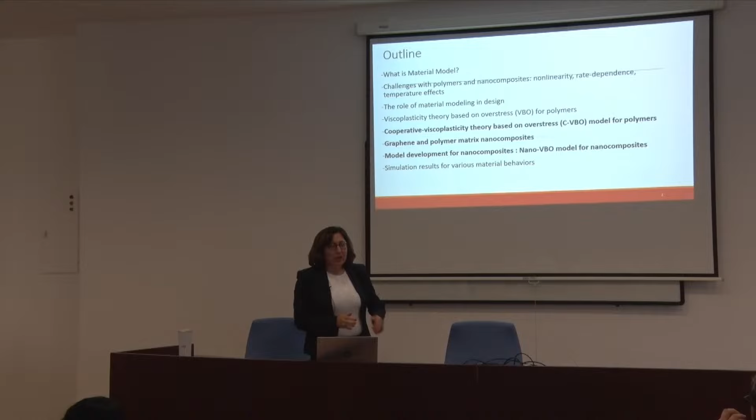The outline of my presentation will be as follows. I will first start with the definition of material models - what is a material model, and what are the challenges with polymers and nanocomposites. Then I will talk about the role of material modeling in design, and specifically the viscoplasticity theory based on overstress. Then I will mention graphene and graphene epoxy nanocomposites, and the last section will be model development for nanocomposites, with some simulation results at the end.

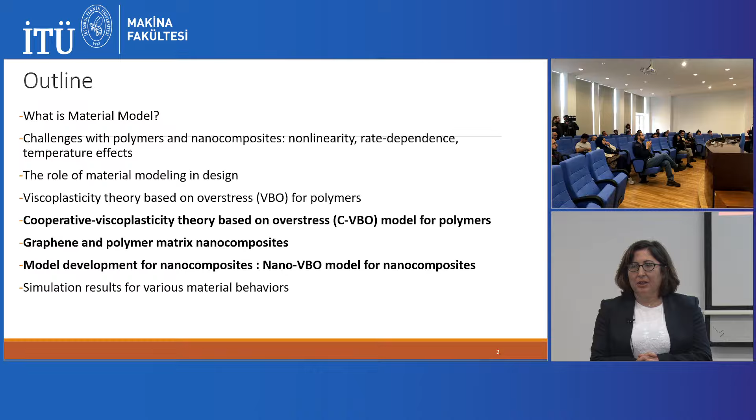So what is a material model? Why do we need a material model? Basically, a material model mathematically represents the relation between stress and strain. We know that all components, all machine elements or parts, are under the effect of different loads. As a result of these loads, we observe stresses and deformation, and we would like to find out the relation between them.

So when we say material model, or constitutive law, what is the well-known material model for metals? Everybody knows, I am sure - Hooke's law. Hooke's law is the material model which works well for metals, for elastic behavior. But when we come to polymers or nanocomposites, the situation gets complicated - it is much more complex and quite challenging. That's why today I will talk about these material models.

If you are going to use polymers in a structure, how are you going to design it, how are you going to use the material models, which material models should be used, and what is the process of developing these models.

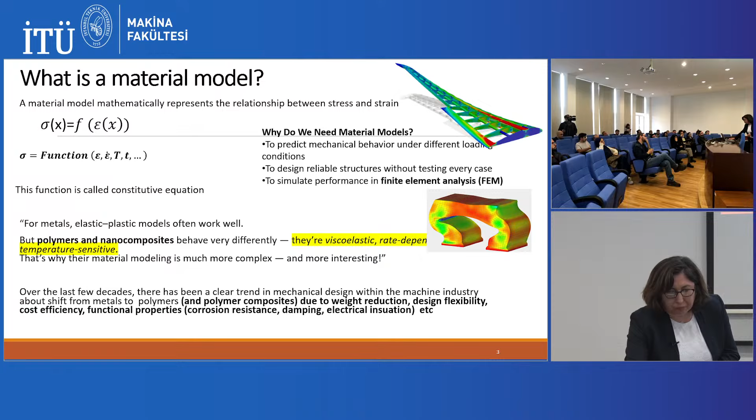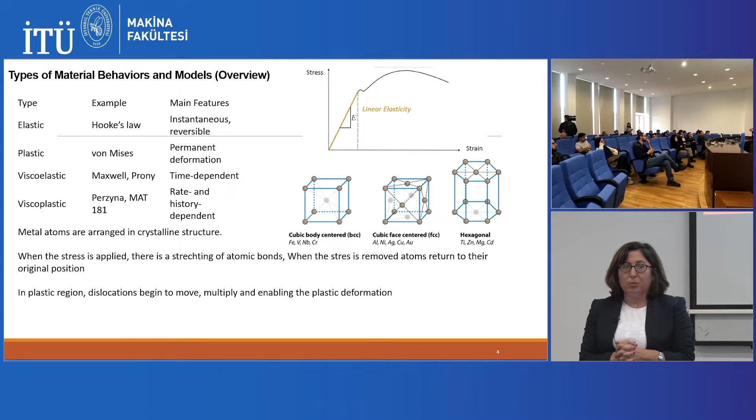So what is different from metals? We know that metallic materials behave elastically, and elastic and plastic behavior is observed. But when we come to polymeric materials, the behavior is viscoelastic. You can understand from the name that it is a little bit like solid and a little bit like viscous - a combination of elastic and viscous behavior, basically called viscoelastic.

So when the behavior is viscoelastic, what we observe is that material behavior is rate dependent. On the left side you see a stress-strain curve at two different strain rates - strain rate means how fast you are loading or unloading the structure. If the material is elastic, we get only one curve. However, if it is viscoelastic behavior, you observe two different stress-strain behaviors, because loading rate affects the material behavior. This is one of the main differences from metals.

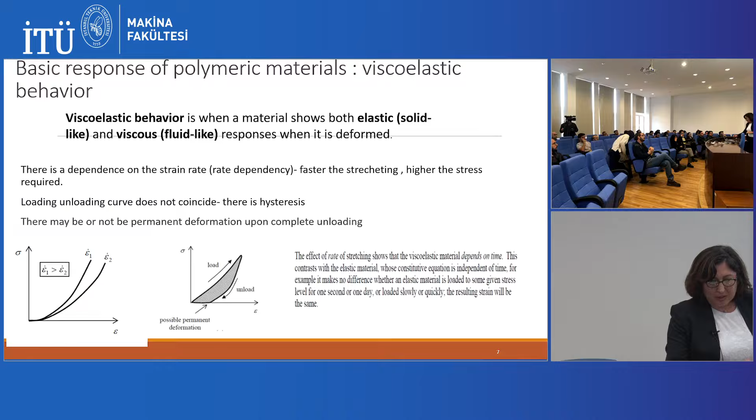So time dependent, the other name is rate dependent behavior. There are, of course, a couple of other observations about polymers, about this behavior. One of the behaviors is creep, and the other one is relaxation. These are the common behaviors that we observe in polymeric materials.

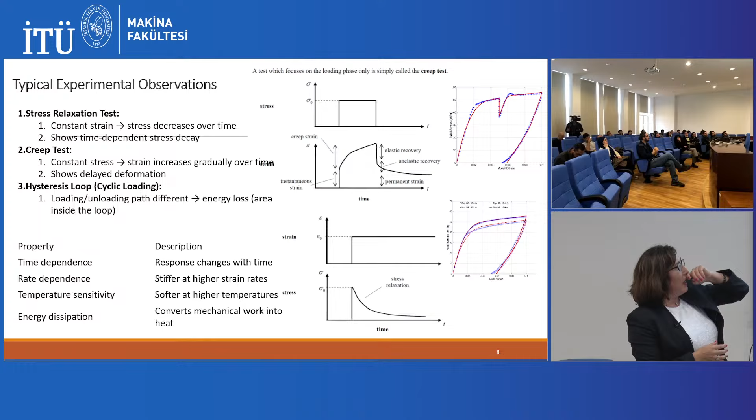On the right side, you can see some stress drop in the stress strain curve. This is basically the relaxation that we observe, or some creep behavior. In Turkish we call creep sürünme. At constant load, we observe deformation on the material, so the deformation is not constant, with time it changes. These two behaviors, in addition to rate dependency, give us the idea about viscoelastic behavior, and we need to define these viscoelastic behaviors.

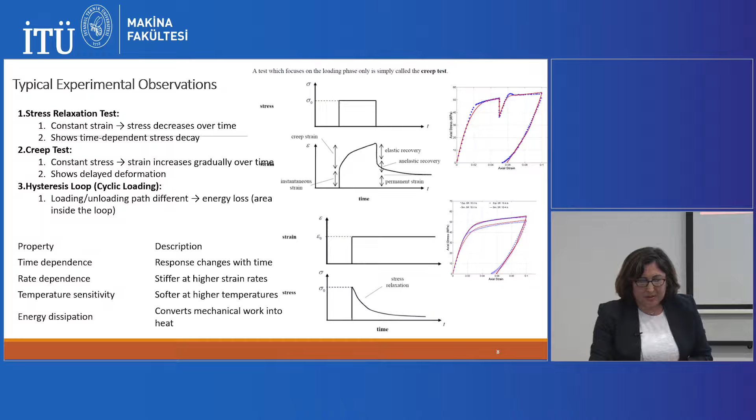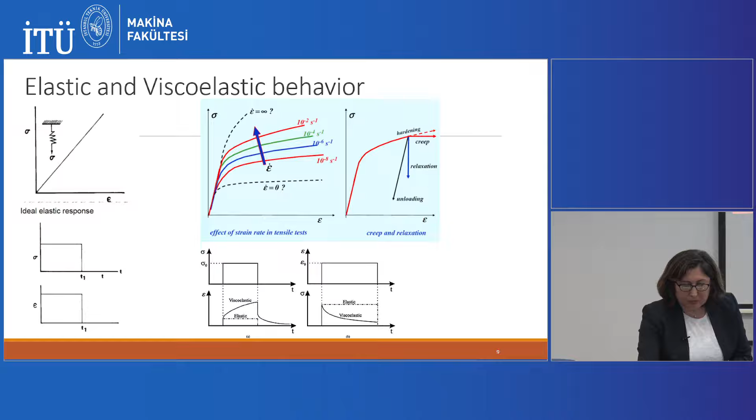So we need to define such a behavior. Such rate dependency needs to be defined. For that purpose, different material models are used. The well-known ones are the Maxwell and Kelvin models. Viscoelasticity basically starts with the introduction of these Maxwell and Kelvin models, and combinations of them have been used quite extensively.

Today I would like to talk a little bit about what a model should consist of in the case of viscoelastic or viscoplastic behavior. Especially during the design process, if you are using a new material and you do not know how it behaves or which material model you will select in the design, you have to know exactly what's going on, or how we can define this behavior.

So what should be the essential components of the viscoelastic model? When we consider the elastic behavior, we just use the spring. Spring behavior tells us the elastic behavior, there is nothing else. But in the viscoelastic case, we include the dashpot element as well, because it gives us the information about this viscous behavior.

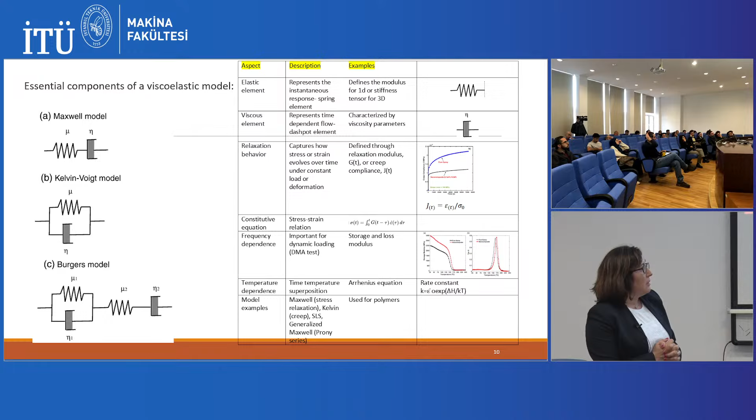Considering these spring and dashpot elements, it can be just one, or a couple of them can be together, like in this case. And there are some other properties as well. If you are interested in temperature dependency, you need to include the temperature effects, or for some frequency dependency, you have to include other effects. But as an example, Maxwell, Kelvin, generalized Maxwell, standard linear solids - these are the material models for viscoelastic behavior.

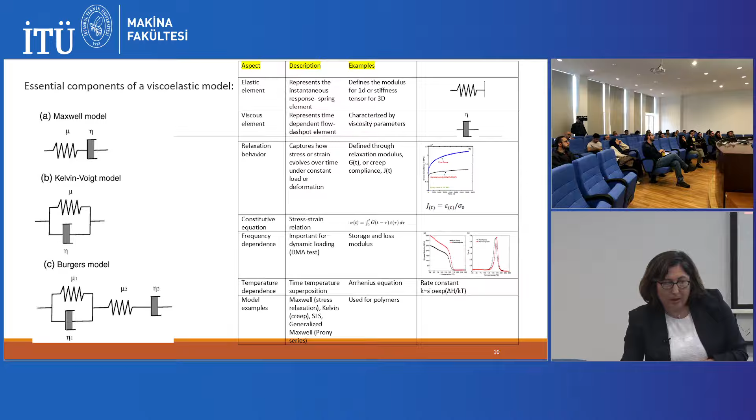When we come to the viscoplastic behavior, in fact metals behave viscoplastically, some of them, not all. So for metallic materials, you can also use viscoplastic materials, because some materials like stainless steel behave elastic and viscoplastic.

So in the case of viscoplastic, again you need similar things. Apart from what I mentioned about viscoelasticity, you need a yield surface. So what is yield surface? In the elastic, if you are dealing with elastic and plastic behavior, or viscoelastic, viscoplastic behavior, you have to figure out at which point the yielding occurs. Everybody knows, I guess, what is yielding - akma in Turkish we call it.

So you have to specify at which point it is going to yield, and for that purpose we need a yield function. Von Mises, I'm sure you guys heard of it. So von Mises yield criterion has been used extensively, and these plasticity models are present as well.

Hardening laws, because material hardens. You remember the material classes - after yielding, you observe some hardening, and you have to specify this hardening as well. And materials are under the effect of cyclic load, not just loading. So in this case you need to define this kinematic hardening as well. These are basically what should be in a viscoplastic model. Of course, constitutive law or strain rate formulation is also an important phenomenon in these models.

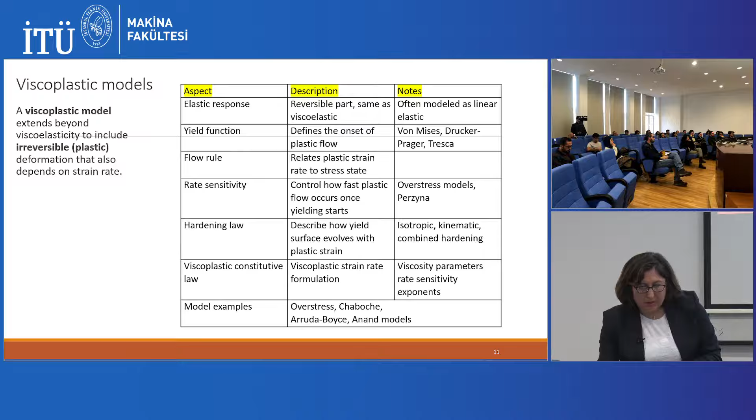I put some of the material models in ANSYS. I select some of the elastic, plastic, hyperelastic, and viscoelastic models. There are quite a bit of material models, so the process of selecting the proper one is important. As an engineer, your role should be deciding which model is proper for your application. Otherwise, the FEM results don't have any meaning. If you didn't select the proper material model, the rest is just garbage.

But I see generally people who deal with finite element analysis, if you are especially working on metals, elasticity modulus and Poisson's ratio solve the problem. But for different materials, for polymers, for elastomers, etc., deciding which one is better or which one is proper is quite important.

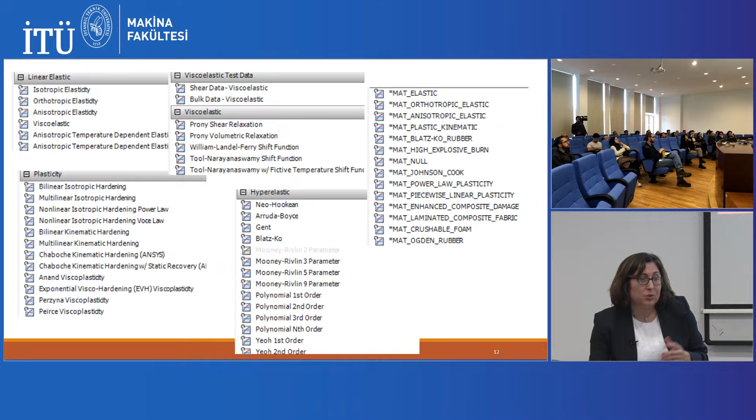I'm going to talk a little bit about what should be in each model. Each viscoelastic and viscoplastic model should contain these components. I don't know if there are some PhD students in the audience, but if you are going to deal with this material development process, in a couple of minutes I'd like to talk about what these steps should be and how you can develop the material model.

The role of the material models I already mentioned a little bit, but again, in structural analysis this is the most important component because it gives us the relation between stress and strain. So how we are going to develop the material model.

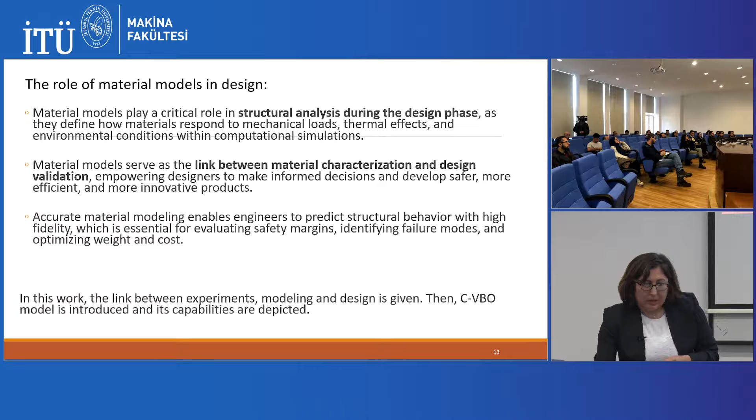Today especially I'd like to focus on this: what are the main steps, from where we have to start? Starting point is always experimental work. You have to perform experiments at different loading conditions. On the left side, you see some of the results of the experiments. Considering this experimental work, we develop the material models, because macroscopically whatever we observe — I'm talking about the macro model, or phenomenological model, or continuum theories as we call it.

There are different scales, and there are so many different material models. In the second part, you can see the different scales. It goes from continuum to micro, meso, nano — so many scales.

But as engineers, we are interested in the macroscopic level models. Of course, the other material models are quite important because whatever we observe macroscopically depends on what's going on at the micro level. That's why we have to know what is going on at the micro level and the connection between them. There is so much work going on in this area — how we can link these models is another issue we are dealing with.

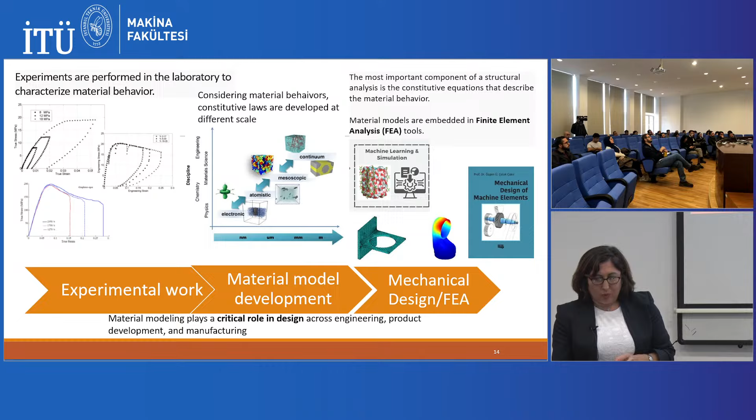Specifically, after mentioning these issues, I'd like to talk about the VBO model that I've been developing over the years. This is the viscoplasticity theory, developed by Erhard Krempl. He was such a nice guy — he was my PhD advisor while I was at RPI.

Overstress is — I don't know if anyone here deals with plasticity rules — generally we mention that you need a yield surface. In this theory, we do not have a yield surface; instead, we have the overstress concept, and there are some state variables as well.

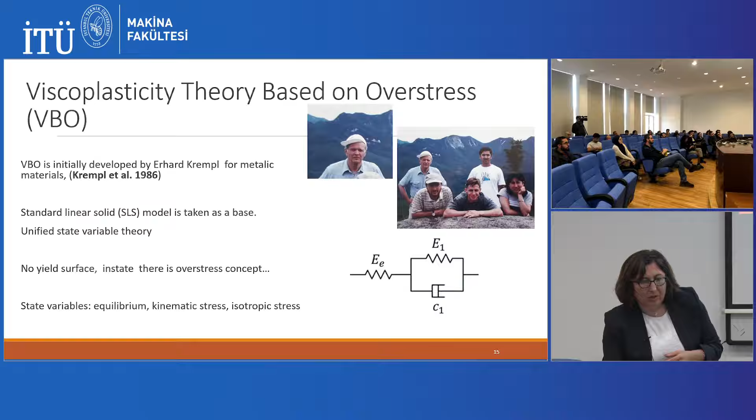These are the formulations — the flow rule for the VBO model. This D is similar to epsilon; epsilon strain is used in small deformation, but if you go to large deformation, it becomes the rate of deformation tensor. That's why the formulation is written as D elastic plus D viscoplastic — basically a sum of elastic and viscoplastic behavior, or viscoelastic-viscoplastic behavior. The first section is basically Hooke's law, but the second section tells us about the viscoplastic behavior.

On the right side, you can see this SLS model, but a modified version — the spring and dashpot become nonlinear.

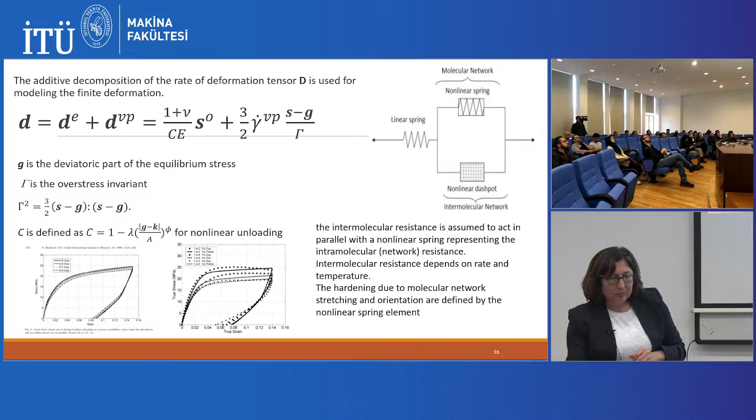We mentioned that for the viscoplastic region, kinematic hardening, isotropic hardening, or combinations are important. So that's why the model needs you to define these quantities into the theory as well.

So K here is kinematic stress. It is used to model the Bauschinger effect. Isotropic stress is for cyclic loading. I won't go into details of them, but basically in the theories we need them. We also have equilibrium stress, which is quite different from some plasticity theories in the literature.

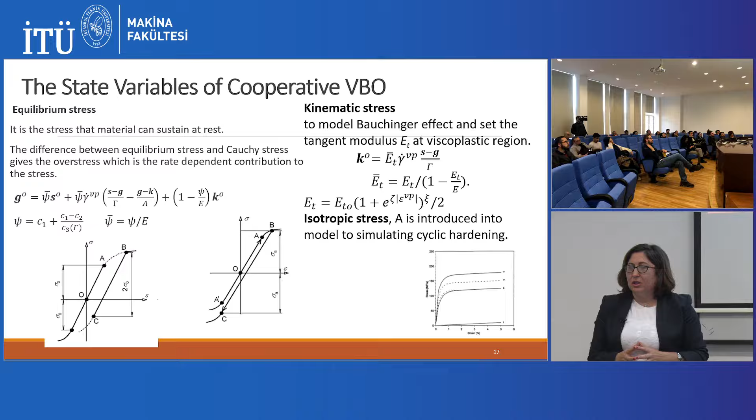The last important formulation is the viscoplastic strain rate. This viscoplastic strain rate, considering the Eyring equation, is this one.

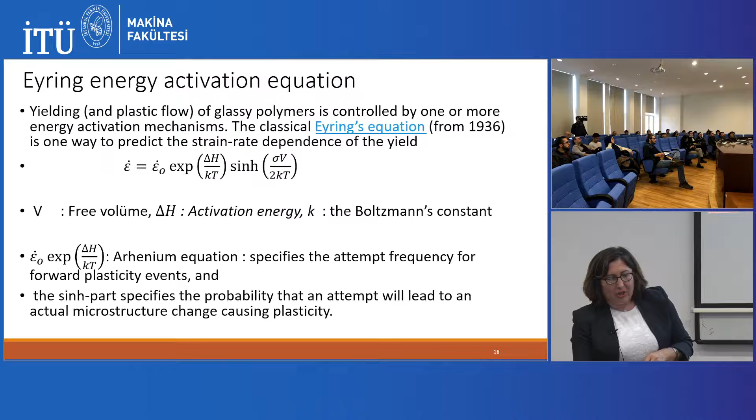In 1936, Eyring defined this formulation, and he considered that yielding is controlled by some energy activation mechanisms, and he defined this formulation considering the activation energy and free volume, etc. Considering this formulation, I implemented or modified it and used it in the VBO model, considering this Eyring formulation.

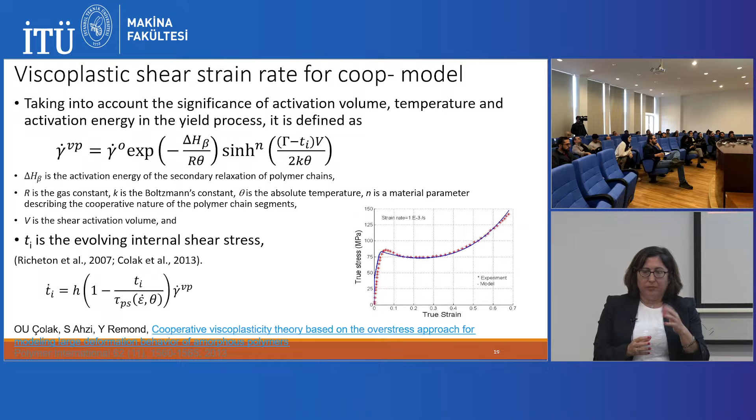So we mentioned that the material is rate dependent, also temperature dependent. So it means that you have to define the elasticity modulus as a function of the rate and the temperature.

So are you guys familiar with this graph on the right side? What can it be? I don't know whether you have seen it in material classes. This is a dynamic mechanical analysis result, DMA it is called. If you are dealing with polymers, you definitely have to run this test to find out the transition, to find out the glass transition temperature and how the properties are changing.

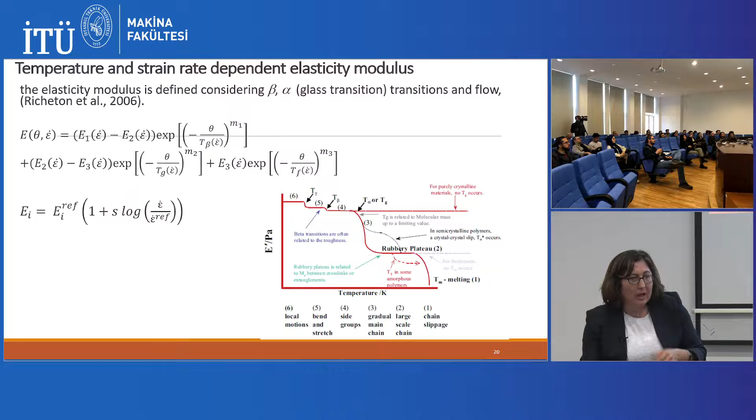This is important. Considering this DMA, we modify the elasticity modulus as a function of rate and temperature as well. But in an earlier version, for instance, we just used 1E. But this is the final form of the model. These are some simulation results.

This unloading behavior, on the left side you see loading and unloading. Nonlinear unloading behavior is not an easy behavior that can be captured. If you go to the literature, you will see that most people just deal with loading. But when we come to the unloading, if it is nonlinear, it is not easy to define. But with this modification, we are able to simulate this behavior.

On the right side bottom, this is multiple creep, which is also captured. Relaxation - these are important in the components. For instance, in a press fit application, relaxation is important.

In a preloaded screw connection, it is important because if you load a structure, you expect that load to stay constant. It shouldn't drop. Creep for structural stability is quite important. If the deformation is increasing with time, you lose structural stability, meaning you cannot use this machine element anymore. So that's why you have to know how the material behaves if you are dealing with polymers.

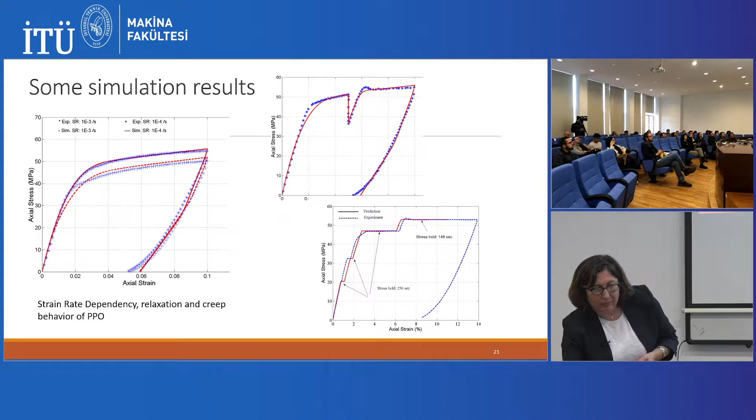What is also interesting in polymers is that behavior is not just one type. For instance, in metals it's linear elastic then hardening, that's it. But depending upon the material, polymers behave differently.

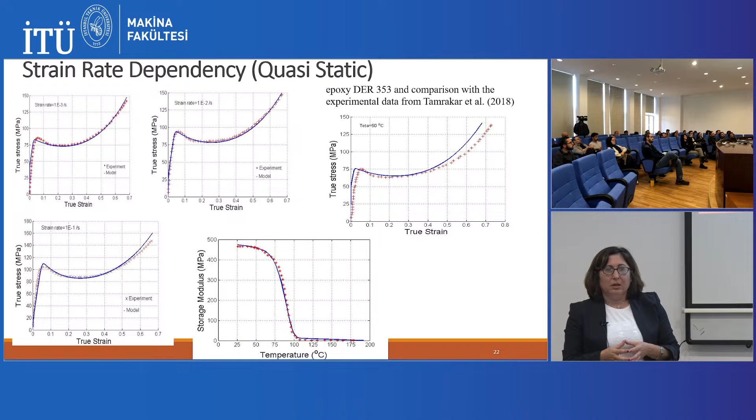For instance, here, what is this one? PPO. The behavior of PPO is something like this. Epoxy's behavior is something like this - some linear behavior, yielding, softening, and hardening. So these are different behaviors that we observe, and with this model we are able to capture all this rate dependency and temperature dependency as well.

This is for a hypothetical, made-up material. I showed some cyclic loading - we are able to capture it as well.

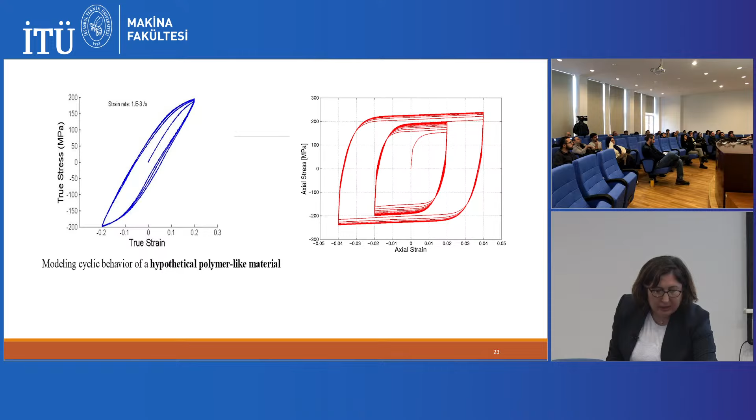So far I just discussed the material models, viscoelastic material models, and specifically the VBO model for polymers. Now I would like to talk about nanocomposites, because of what my PhD students and myself did. We are modifying the present models for polymers, and by modifying these models we are able to model nanocomposites as well. So the question is how we will go from the polymer model to nanocomposite modeling.

I will discuss this, but before that, I would like to mention a little bit what nanocomposite is. So could you just read a little bit while something is happening to my throat? I'm sure you guys know composite - what is composite?

Mixture of materials means there are at least two components. One component is called matrix, the second component is filler or reinforcement. Polymers, even with many good properties, don't have high strength, so we cannot use them for every application. What we need to do is make composites. A composite can be just a composite, or it can be a nanocomposite. In a composite, the filler is not in the nanoscale, it's at the macro level. But nanocomposites also consist of at least two components, matrix and reinforcement, except at least one component should be in the nanoscale.

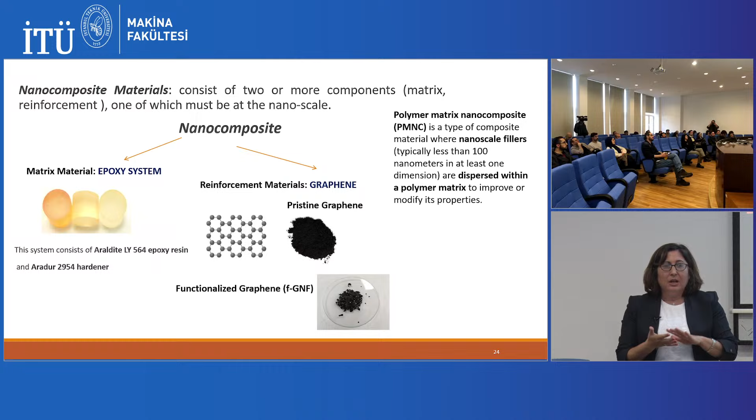What is the main material in graphene? Carbon, graphite. With different manufacturing techniques, these graphite layers are separated from each other, and you get one single layer - that's amazing. So who discovered this material? These guys, Andre Geim and Konstantin Novoselov, in 2010, and they got the Nobel Physics Prize.

Since then, for 15 years, there has been so much research going on in this area. As an academician, in academia or in industry, recently they also started to work on it, and it has been started to be used as a nanofiller.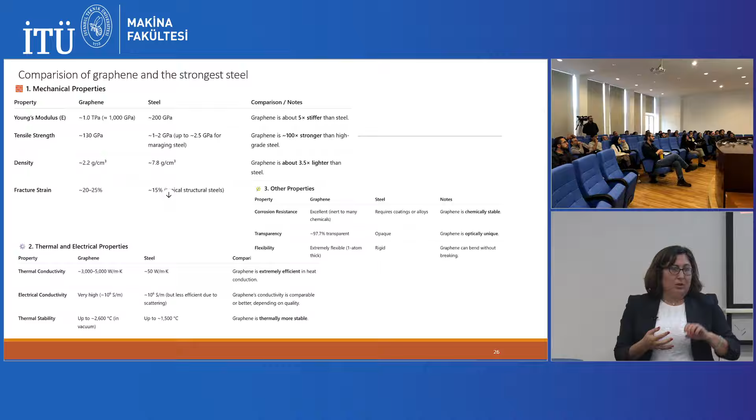But it's not only the mechanical properties - other properties, electrical and thermal properties, are amazing too. That's why it has been used for different applications. You can see some application areas: multifunctional graphene epoxy, insulating packaging, aerospace applications, sensor applications, automotive industry. Wherever you would like to decrease the weight and increase the strength, you can use these materials.

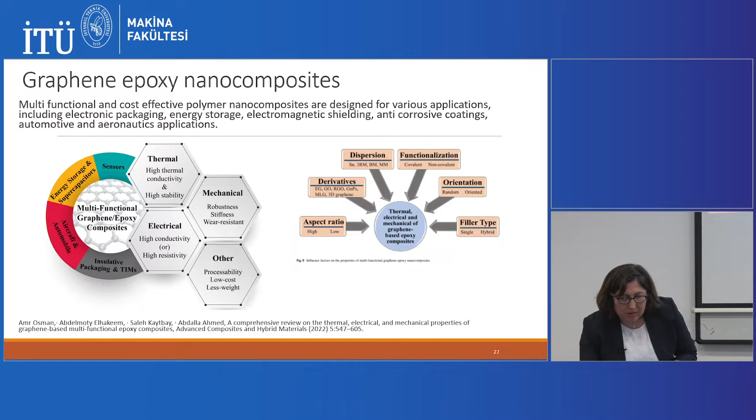Of course, even though this is a nanomaterial with such high strength at the nanoscale, you might consider how the stress strain behavior is captured. Can I use tensile testing equipment for this? What do you think - how do they get a single layer of carbon, graphene, and test it?

That is something the instruments in our labs cannot do. The method is nano-indentation, nano-indentation in an atomic force microscopy - that is also something recent in the world. People in the Makina groups are quite interested in this. We know atomic force microscopy or scanning electron microscopy - generally we use them for scanning the material, but they use it for testing as well, which is also important. It is called in situ SEM, in situ TEM. Because it is just one layer, the thickness is just one single layer, so how are we going to test it? This is the method - it's also something quite interesting. I will skip the details.

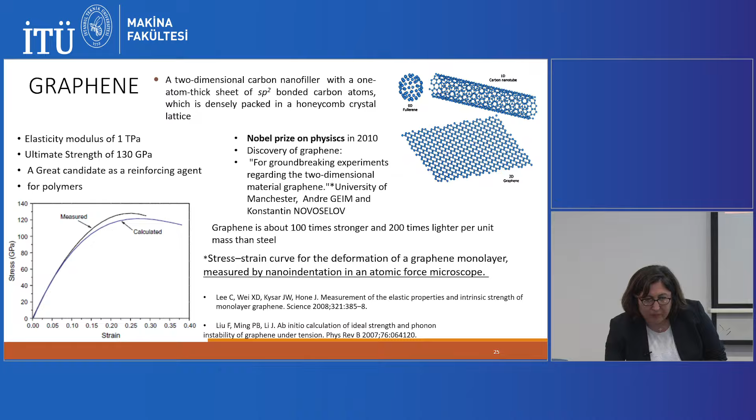So graphene is that strong, that powerful, has so many properties - let's use it and get the same result for the nanocomposites, we wish. But of course there are some issues. At the nanoscale, it's such a powerful material, but when we use it in nanocomposites, we do not get that powerful properties. The reason is two main issues. What are they? Let's look at it - there are two main issues in the manufacturing. Gökhan, how much time do I have?

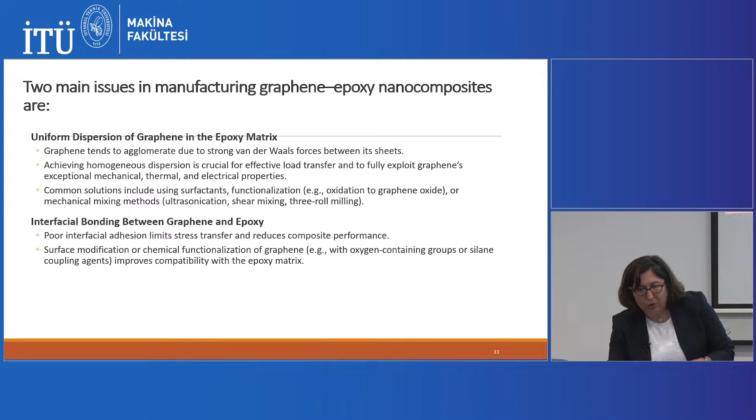For that purpose, what we have done is functionalization. Functionalization means you add some groups on the graphene so that it links the matrix better. Let's assume this is the matrix, this is the graphene. This connection is not good, but if I can make some wiring like that, it can connect. So functionalization is basically this.

This is the process that we are following in our lab. I will not go into details, but some mixing with a surfactant, sonication, filtering, etc., and at the end we get functionalized graphene.

If you guys are working on nanoparticles or nanomaterials, you definitely have to do a good characterization. So I have done this and gotten functionalization, but that's not enough, you have to prove it. You have to do FTIR, Raman, XRD, etc., so many characterizations, so that you can figure out that you really get the functional graphene.

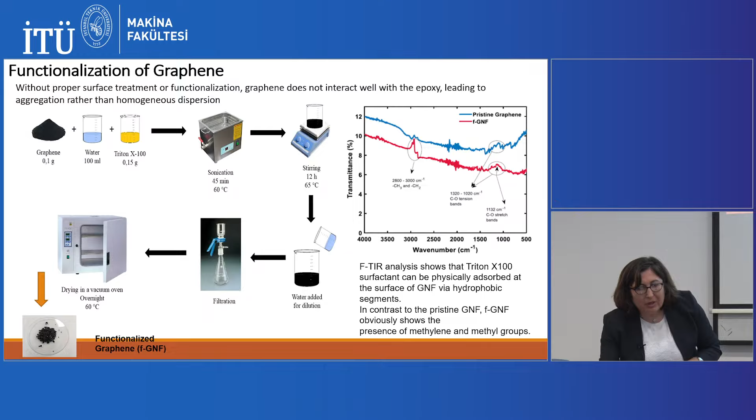Following this functionalization, we manufacture the nanocomposites. This is the method we are using: we basically mix the functional graphene with the epoxy, then use magnetic stirring, and use 3-roll milling. I think this is, at least for us, the last method we are using, because before we used different methods and didn't get good results.

This 3-roll milling work has been done as part of one of my TÜBİTAK 1001 projects, and we got this 3-roll milling machine. What does it do, what do you think? The machine has these 3 rolls, like a hole-punching thing. You just pour the material here, and then, as you see in the picture on the right, it just flows and you collect it.

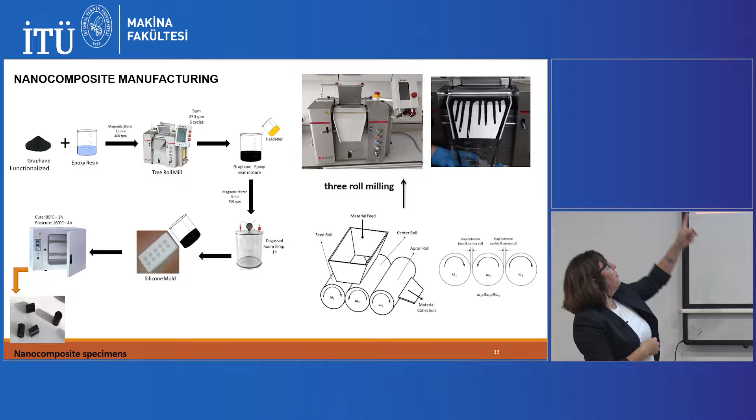So what is the advantage of 3-roll milling? The rolls rotate in different directions, and the distance between the rolls is 5 microns, so the space is just at the micron level. What kind of effect can this have? Shear—it applies shear to the material. Due to this shear, agglomeration (topaklanma) is eliminated.

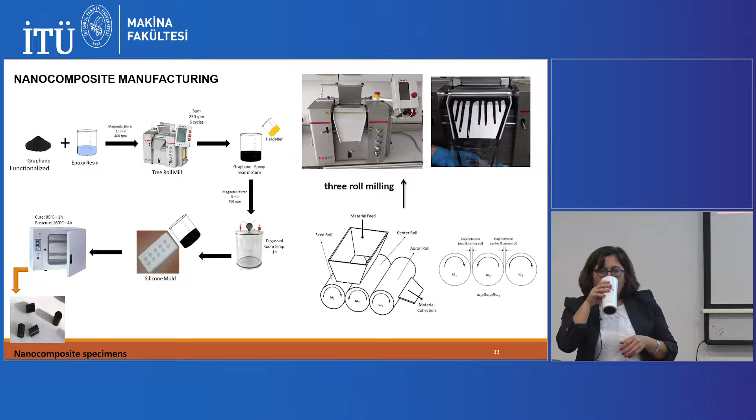We have seen this in our last couple of studies, and we've already published a couple of them. This gives a better result compared to sonication. There are some other steps that you have to follow, and some characterization.

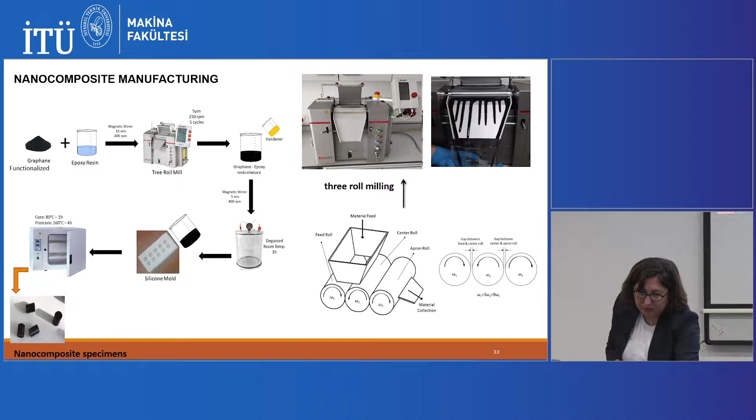Rate-dependent, temperature-dependent behaviors, and also creep and relaxation—these are a must, olmazsa. We have to perform these tests so that we can understand how the material behaves. For instance, the creep resistance is improved quite a bit.

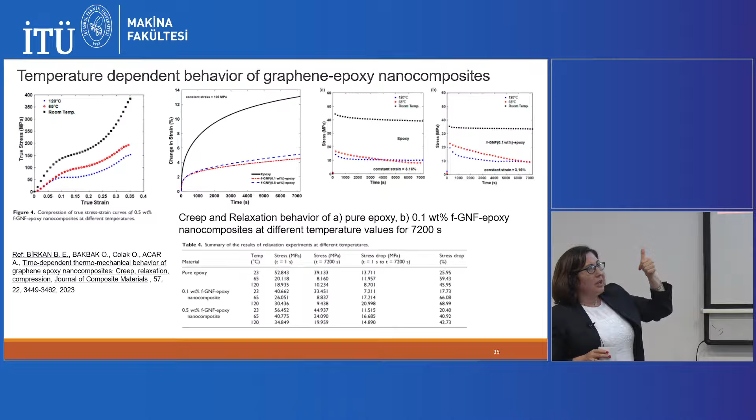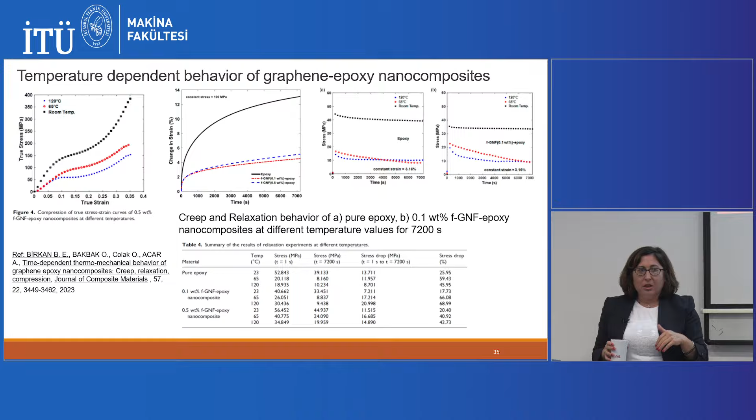Okan, do you remember how much, 40, 60%? I cannot see it in this figure, but the black one is epoxy, the others are nanocomposites. So it means deformation is decreasing, which is what we expect or want.

Sorry about my voice.

So these are what we are doing on the material manufacturing and characterization side, and we also do the modeling of this material.

So when you go from polymer to nano, if I would like to use the same material, the same model, what kind of changes should I do?

Anyone? Just read it. Murat, read it and tell us what should be done. As a polymer, we have just one component; in the nano or composite, we have at least two. So I need an effective one—I should get the properties of the polymer and the properties of the nanofiller, and combine them to get the effective one. That's why, in fact, the main thing is defining the effective elasticity modulus for the elastic region.

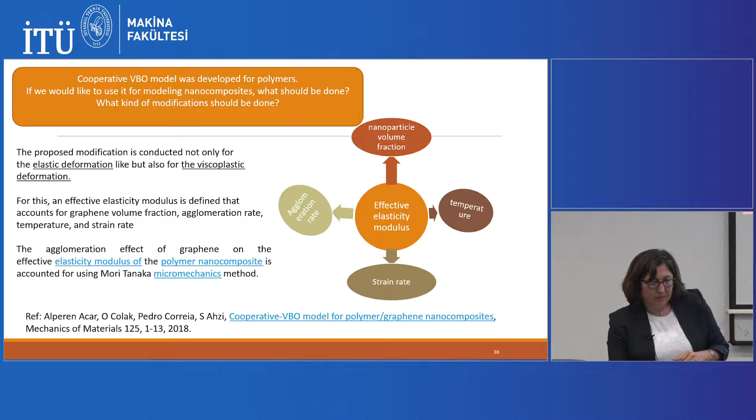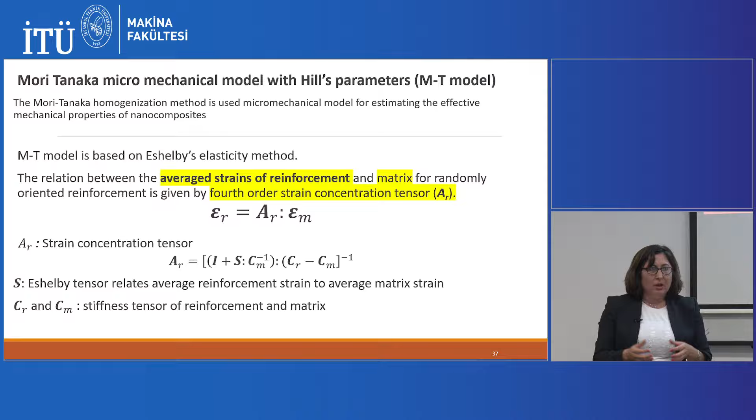Mori Tanaka and these guys define this homogenization technique, with a lot of math. He defines the relation between reinforcement and the matrix, and from this Mori Tanaka approach we end up with an effective stiffness tensor, and from there we get the effective elasticity modulus.

Sorry about that—when I don't teach, generally for a couple of weeks the same thing happens, and after that it's okay.

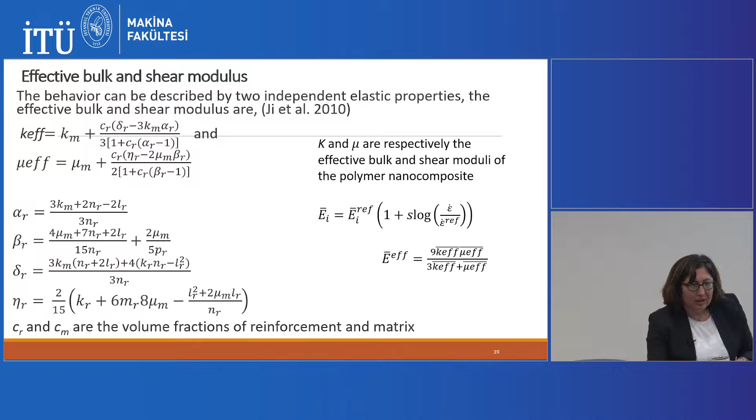So this is for the viscoplastic region. These are some results.

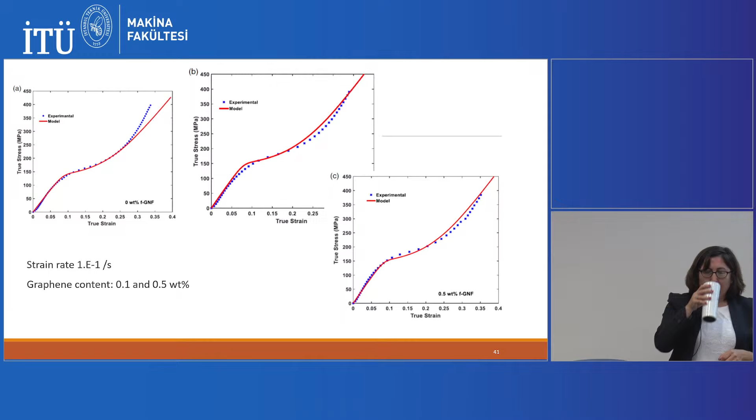You may consider that sometimes when I listen to this kind of seminars, if I see the stress strain curve, I say, what is that? Just a stress strain curve. But really, it is not that easy process. Especially the left side is just the epoxy, the other two for nanocomposites. It means that you just add the properties of the graphene, and you get the stress strain curve. A lot of work, a lot of math.

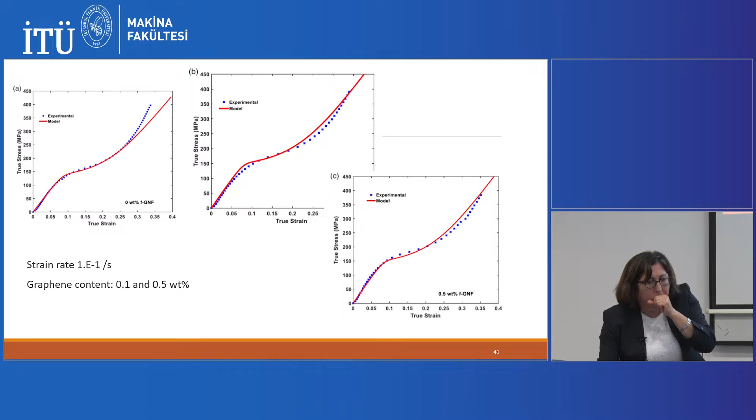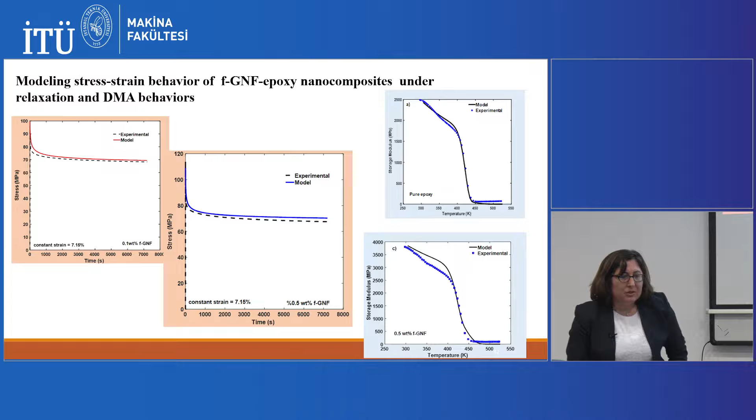And the other behaviors, relaxation, DMA, high strain rate modeling, I haven't mentioned about it, but for the crash test, for the what is Darbe types applications, we need this behavior, and we are able to capture it. These are some works that we have done.

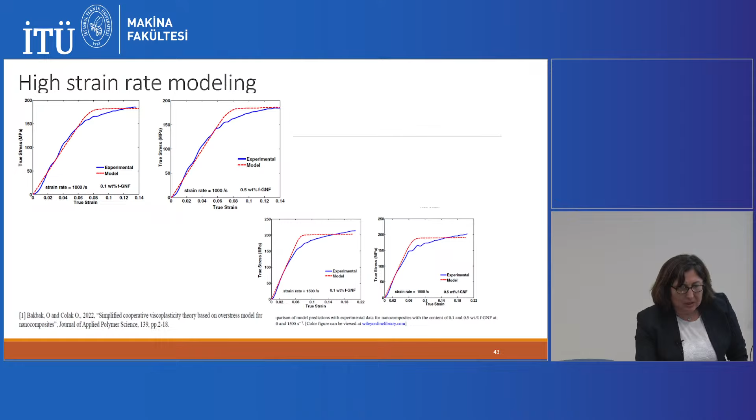And if I conclude, model is important, especially in the design. If you do not select the proper model, your analysis doesn't have any meaning. So select the proper material model. To be able to select or decide on the proper material model, you have to do the experiments. Because according to experiments, you are going to decide on which one is proper. So that's why not just the modeling, not just use FEM, but experiments, maybe manufacturing, if you are in the material side, and then use it properly.

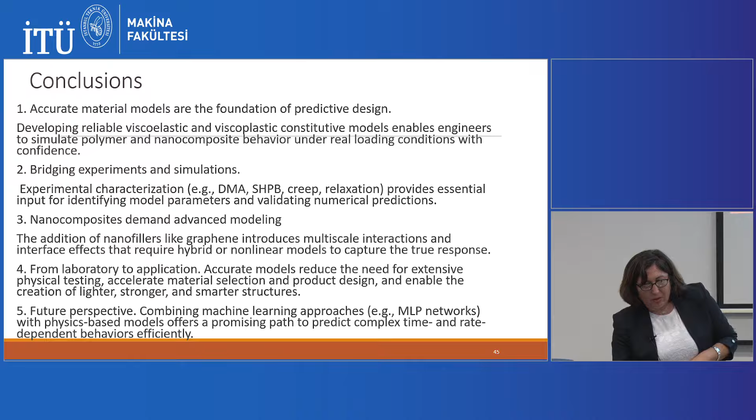Maybe the last thing I haven't mentioned, that especially this machine learning is everywhere. So people started to use the machine learning techniques to model this material behavior as well, with the material models, sometimes without. So we will see what is going to happen, but there is also a big trend on this one. Maybe some PhD students, if you are at the point that you are going to decide on the subject, this is something that you may think about it. Thank you very much, and sorry about my voice.

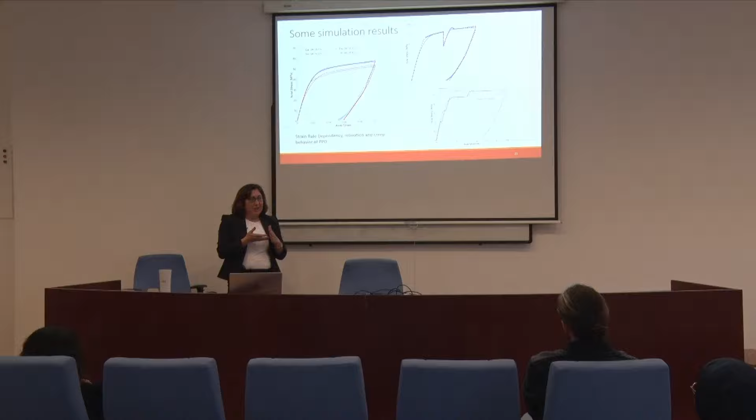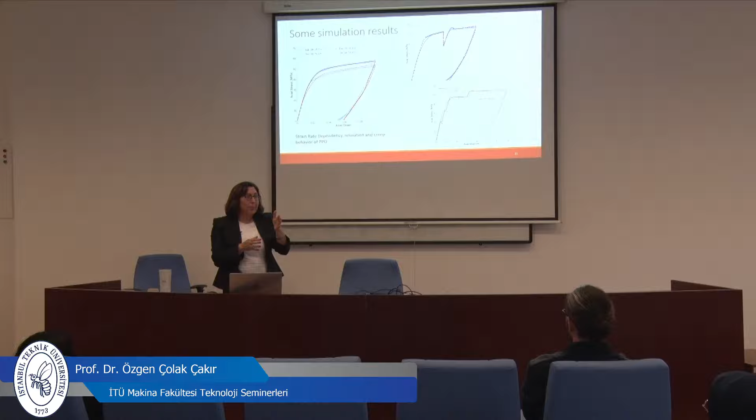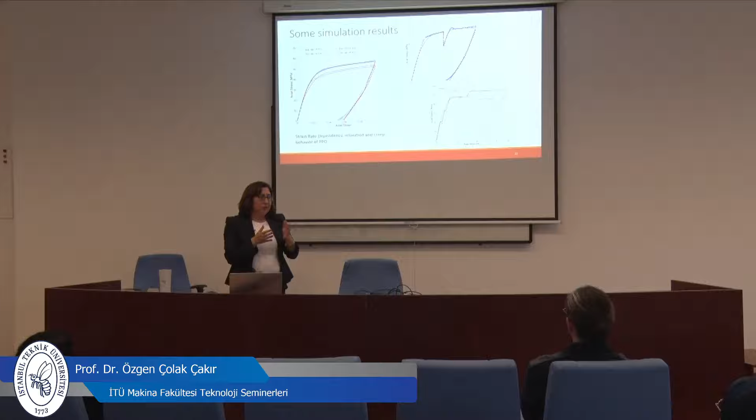One of them can be the initial part of the stress-strain curve. This is used. Another one is the secant modulus, which means that it's like a secant from the stress strain, if it is nonlinear, I have to mention. So it depends on whether behavior is linear or nonlinear. If it is linear, that's fine. You can just use one elasticity modulus, but it is going to depend on the rate. So that's why the formulation similar to what I discussed should be used. But two different, so you should give a range, not just one name. The secant modulus, as I said, it is like a secant.

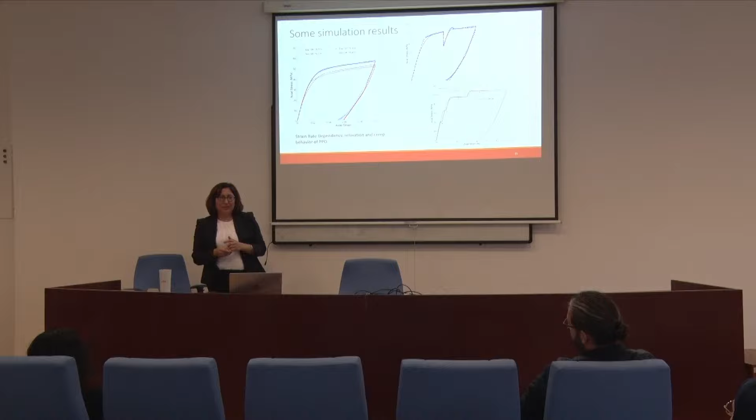Is there any PhD students among us? No PhD students? Okay. I don't know, most of you guys are undergrad. Okay, okay, thank you very much for coming.